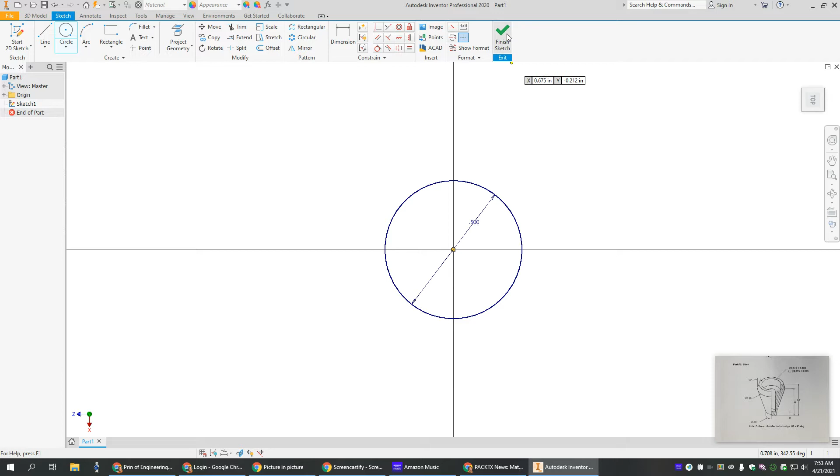And that's all we're going to do with this first part. So we're going to finish that sketch. We're going to extrude this up, and we're going to extrude it up to 0.25 that it tells us.

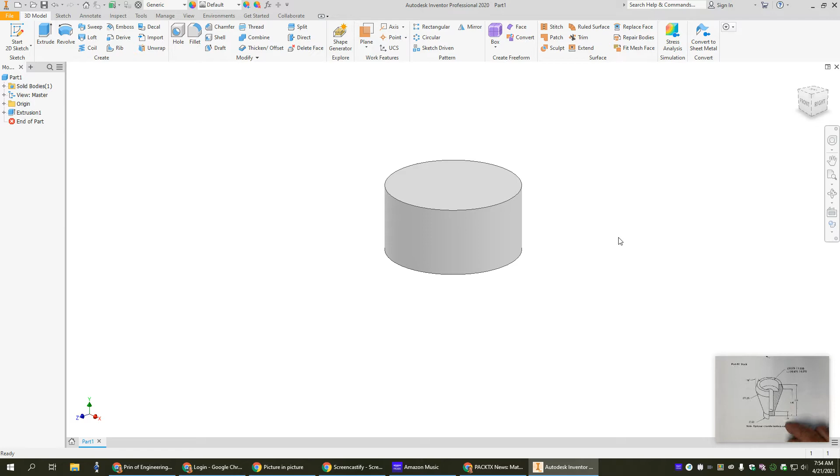Okay, and then we have the bottom part, first part of our train stack. And so now we're going to jump up to build this kind of angled part. And so I'm going to make a work plane up here at the top. So I have to make a work plane that is 1.5 minus the 0.25, so 1.25 above this top section.

So I'm going to go to plane, offset from plane, from this point. I'm going to go 1.25 inches up, and if I zoom out, I can see my plane up there. Okay, now I'm going to make a new sketch on this plane here.

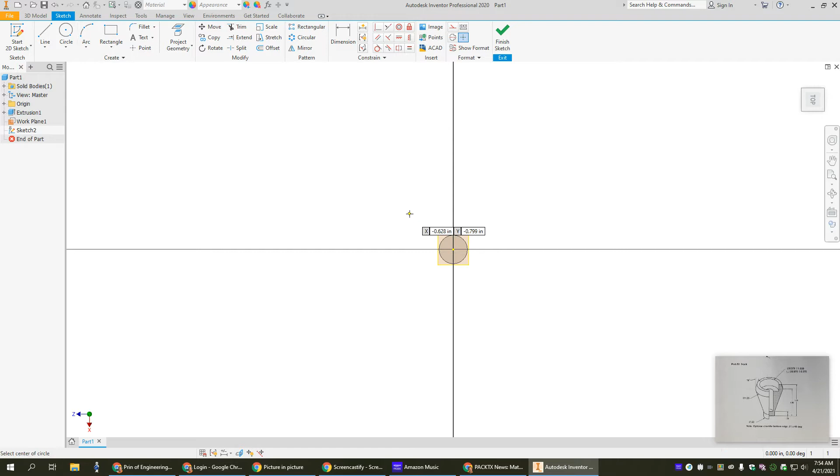I'm going to make a circle. And this one, I want to make the diameter of this, it's 1.25. All right, and now I'm going to finish that sketch.

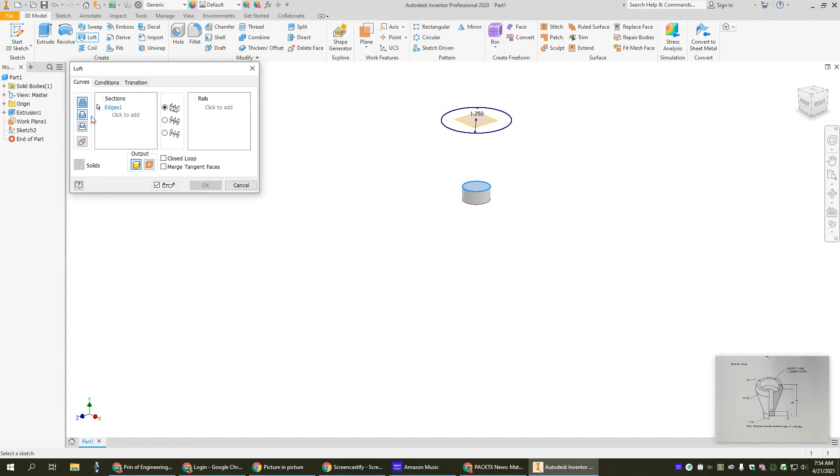Then I'm going to loft from here up to the sketch I just made. So I'm going to loft from this section right here up to this top one. And I want to build them together. So say OK. And now we got that second section made.

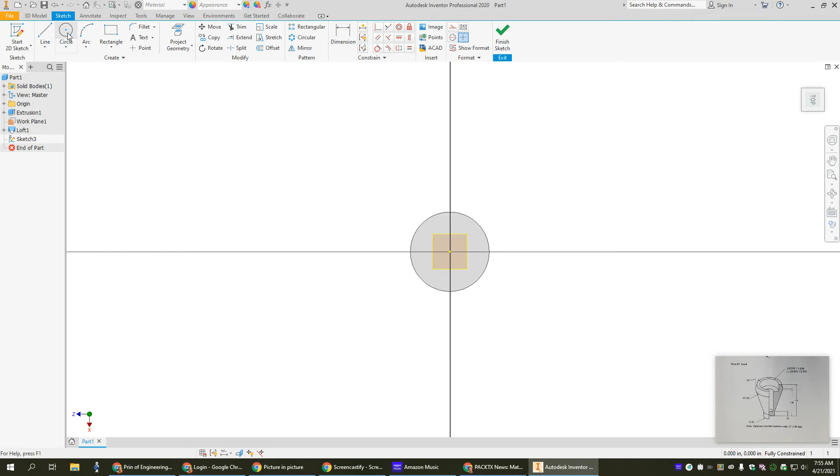And now we got to build the part on top. Okay, so I'm going to extrude a circle up there. So I'm going to draw a new circle. New sketch. We're going to make another circle. We're going to make it the same size. Finish that sketch. And now we're going to extrude.

Let me make this a little bigger so we can see what we're doing. We're going to extrude that top, and we're going to go up the 0.25, the 1.75 minus the 1.5. But we're going to extrude with a taper. We need a 15-degree taper. It tells us right here, 15 degrees.

Okay, so we're going to go up to 0.25. It's already doing that. And then we go into taper, and we're going to do a 15-degree taper. And that went the wrong way, so we have to do a negative 15-degree taper to make sure it tapers in. And then we'll say OK.

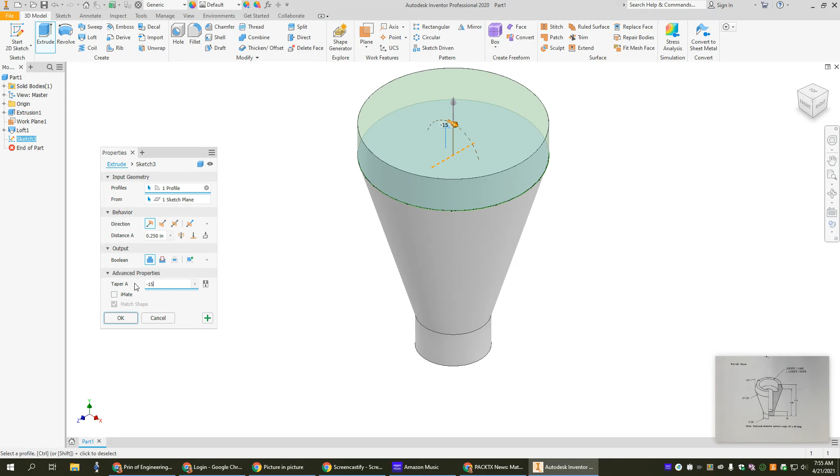And we have our stack mostly done, but we've got to put this hole. And they even give us the hole notes. And so we're actually going to make this a hole.

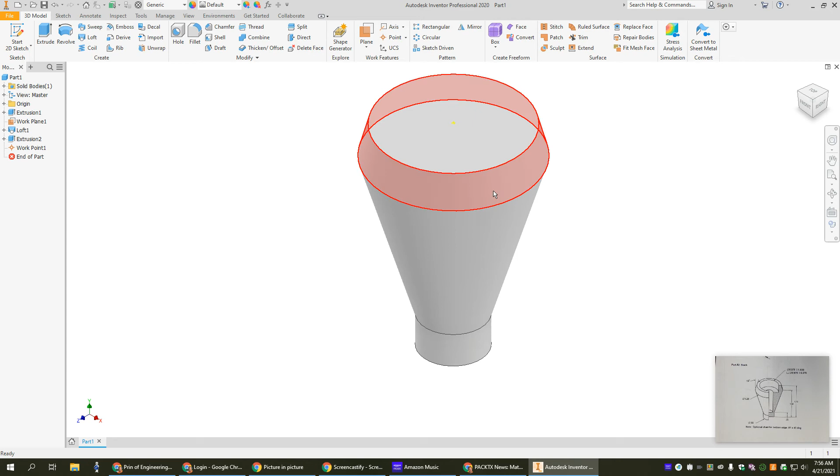Okay, and so we want to put a point on this thing. We want to put the center point of a loop, which is the loop of this. And then let's move this down so we can see what we're doing. Put a hole. We're going to put it at this point. We're going to drill it down into this top.

Okay. We need this to be a diameter of 0.375. It's just going to be a smooth, regular hole, but it's going to have a counter bore in it. So we're going to go select our counter bore. We want the diameter of this part down here to be 0.375.

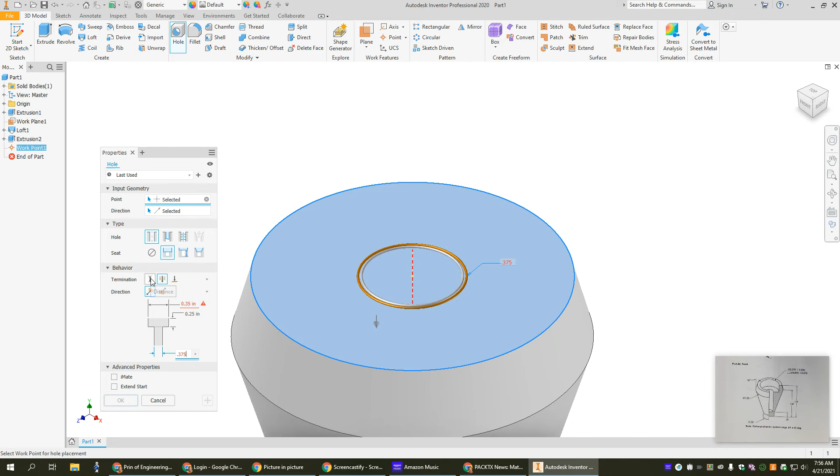We want the depth to be 1.5. We'll change it to distance and do 1.5 deep. And then we want our counter bore. Until it's too small right now, we want that to be 0.875. And we want that to a depth of 0.375.

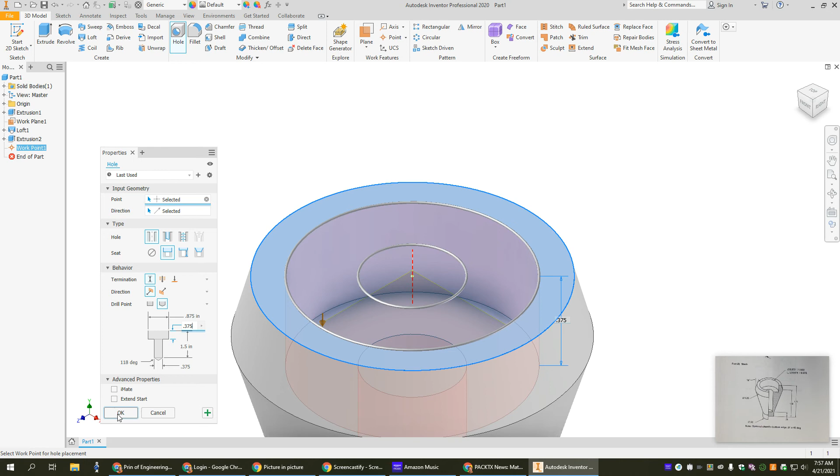And that should be our hole. So we will say OK. And there we go. I'm going to take off the visibility of this work plane so it looks better. Let's zoom out so we can see it. And now you can see there's my hole in my train stack that I'm supposed to have, and we are all done.

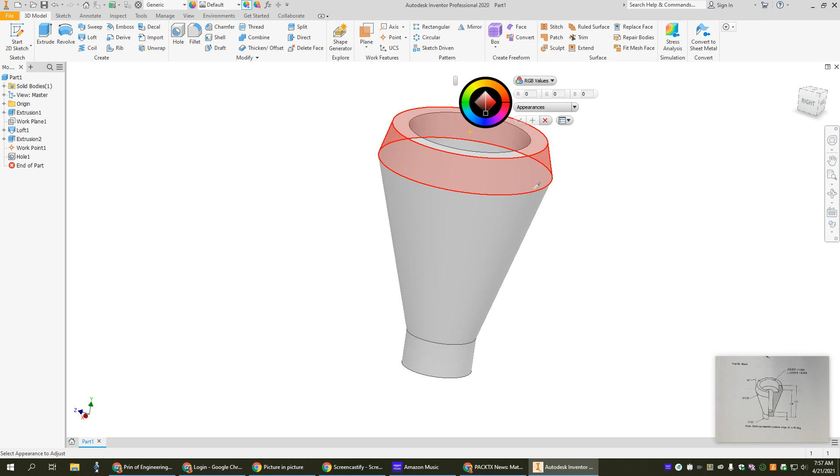Last thing you want to do, of course, if you want to color it, right? So we can color, we want to just color the whole thing. All right, let's make it, I don't know, orange. I like orange. There you go. And now we have our train stack, and we're all done. Make sure you hit save, and you're good to go.